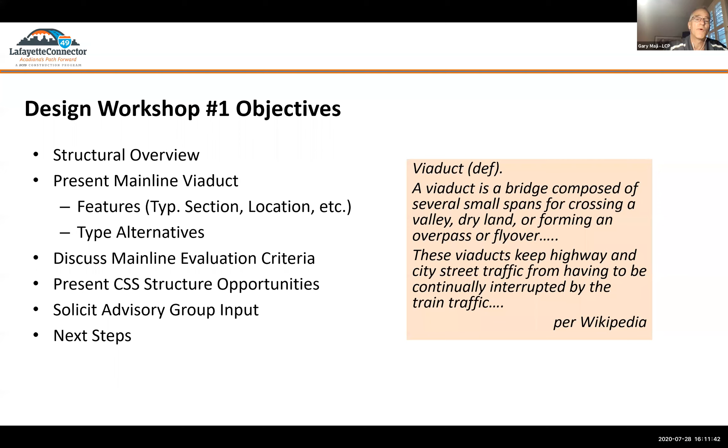So let's get started.

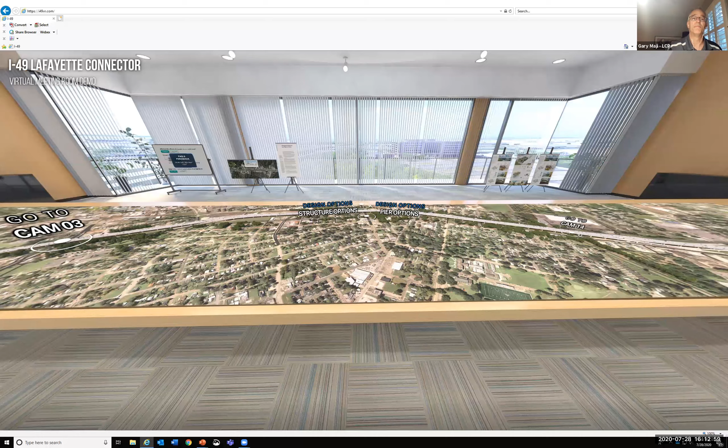So before I get into the slides, I want to get you into what we're calling our virtual room. Bradley's been able to help us put us into a room that shows us exactly what you would be looking at. So as you look from left to right, you can see the south end of the project.

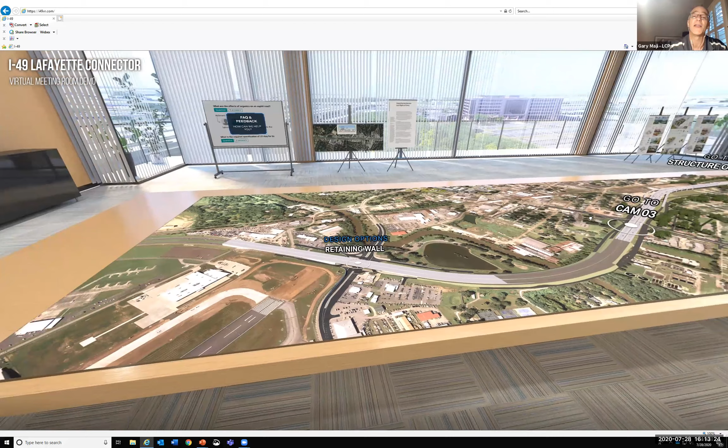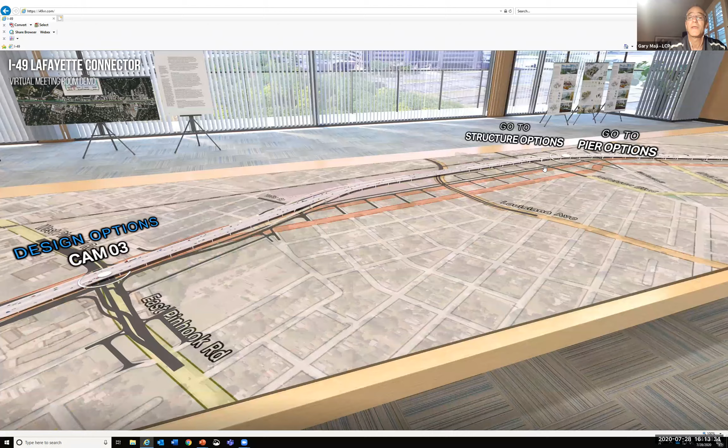And the interchange down there would be University Avenue. As you scroll to the right, you see the beginning of the viaduct from the south end as it goes across and over Pinhook Road and gets into the central region, eventually working its way through the neighborhoods, crossing over Willow Interchange and touching down.

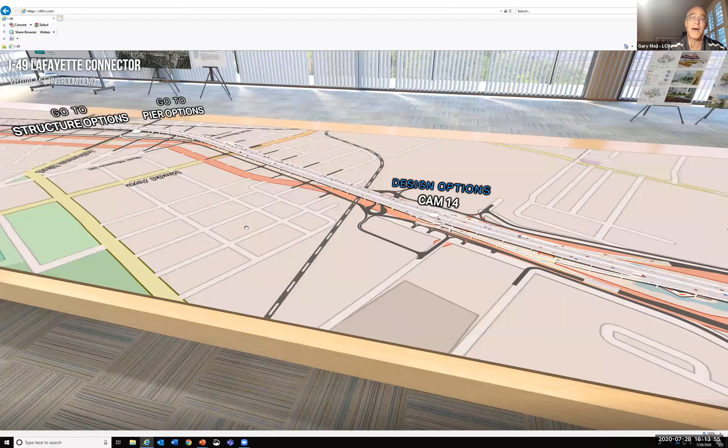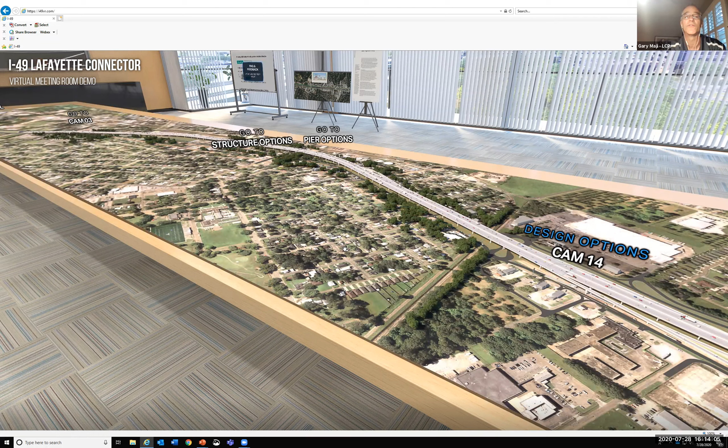We're going to flip back and forth to this a lot, but I just want you to notice it because you'll see the map and the base of the map change from more of a map itself versus an aerial, just to help place you closer to the structure as you think about where this structure is and where the railroad spur is and so forth. And then we'll go along these little areas to provide a little more detail about the viaduct. But the best news is you're going to have access to this after today. Bradley will walk you through how you can, on your own time, scroll through this site and get a little more acquainted with some of the components we talked about.

So let's get back into the evaluation and the structure type. The goal of this project from the mainline viaduct aspect is to provide an economical, safe, and efficient bridge design to serve the project's transportation needs.

We wanted to introduce and identify structure types that reasonably reflect the community and stakeholder input. We want structure types that are technically sound, DOT accepted, as well as cost effective within the overall financial parameters of the project.

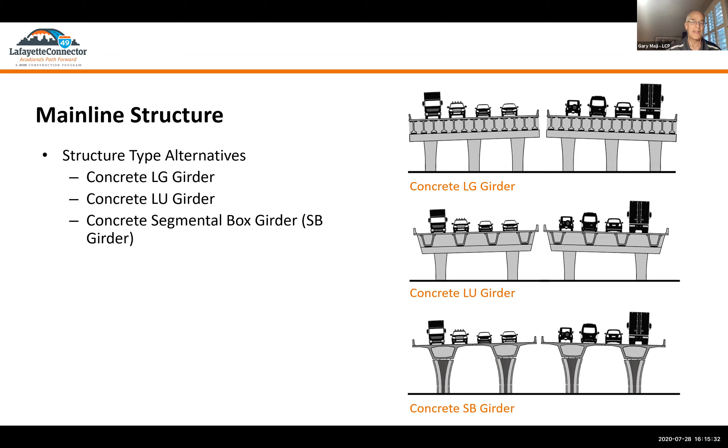That allowed us to identify 3 concrete structure types, which we'll refer to a lot as we go through this presentation: the LG girder, the LU girder, which is the trapezoidal shape in the middle, and at the bottom, which we'll call the SB girder, or the segmental box girder. I'm going to talk a little about each of them, their attributes and what they are.

The LG girder is a girder type you see pretty much throughout the state of Louisiana. It's a very common, very affordable structure type. These girders are precast at a precasting yard and transported to the site, and accommodate bridge spans anywhere from 75 up to 175 feet long. You can see in this depiction 4 lanes each way for this viaduct and the approximate number of girders, which varies depending upon where you are. We can talk about that more as we move into the types.

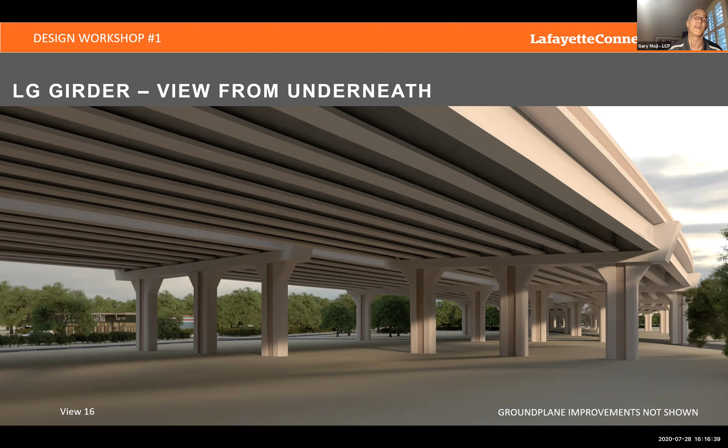So if you want to see what this looks like standing underneath the viaduct, go to the next slide. You can see what that bridge looks like from underneath. Here you're standing seeing this viaduct, and it's 22 feet high. You look underneath, and there you can see the girder lines supported by 3 pier columns for each viaduct, northbound and southbound. If you looked at it from the side, it looks something like this. You're going to see this view as we talk about all 3 structure types. And that's what we mean when we're talking about the LG girders.

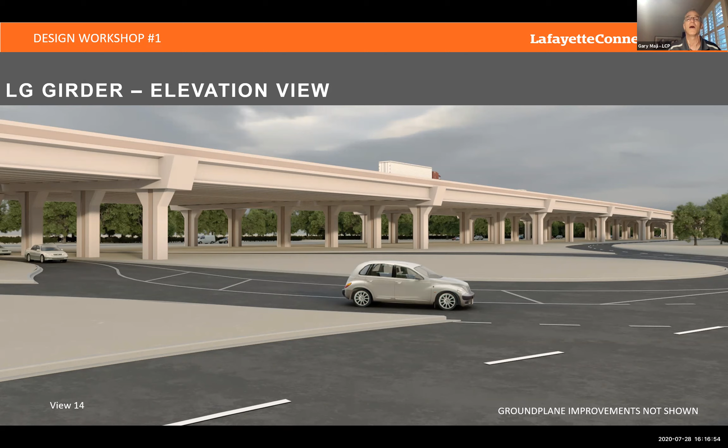Let's move into the LU girders. The LU girders are a newer shape developed by the DOTD, a trapezoidal shape to provide a more aesthetic enhancement, if you will, yet providing the functional needs. These structure types are also precast in a casting yard, and accommodate spans that can go up to 200 to 250 feet in length. But they're also used for shorter spans too, depending upon the needs of that particular project.

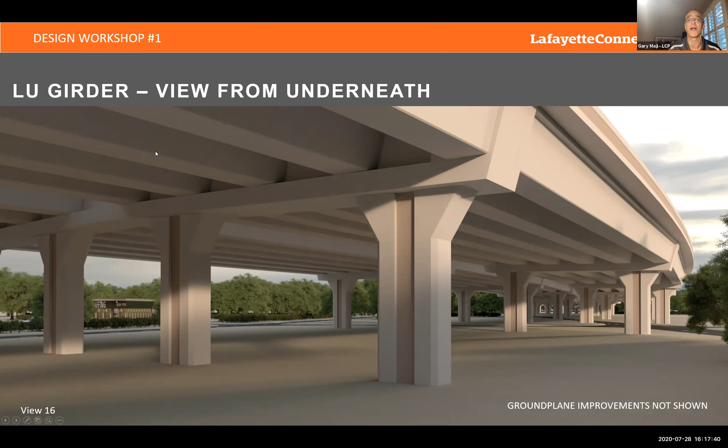So if we look at them from underneath, here you can see the girder lines underneath the structure, supported by 2 columns for each northbound and southbound viaduct. And you see the tapered shape. Then you can see it from the view standing afar, what this structure looks like.

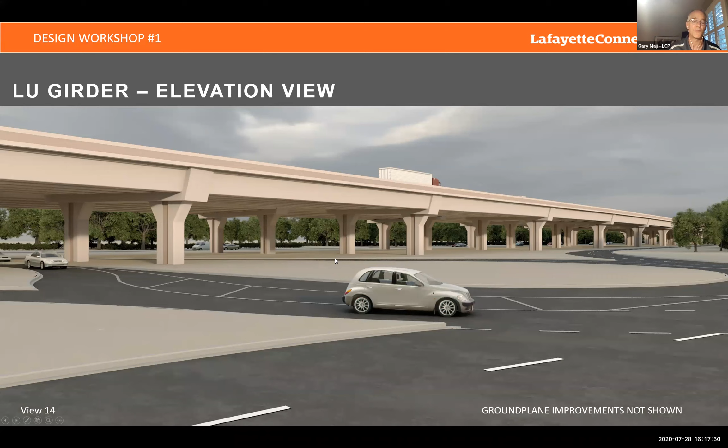And then lastly, we'll talk about the SB girder, the segmental box girder. That's a really simple trapezoidal shape section. This girder can be precast or cast in place at the project site, depending on the needs of the project. But more importantly, it's used primarily to span longer spans, greater than 100 feet and up to 400 to 500 feet. So these structure types are a lot more efficient, and as you'll find out, they're a lot more expensive, but also present a very attractive appearance to the bridge site.

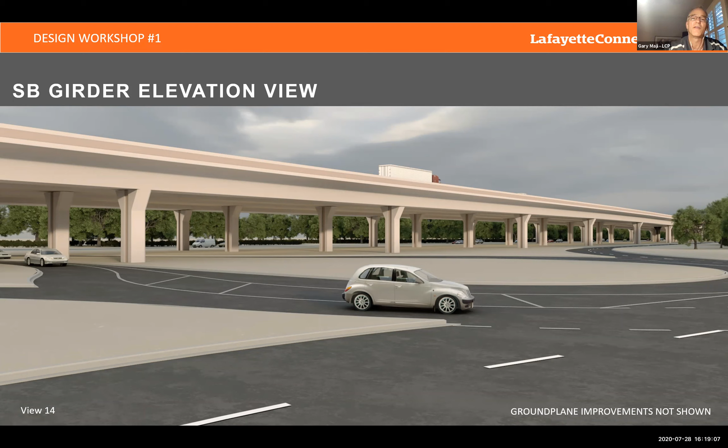So as you look at them from underneath again, you'll see the 2 box girders supported by a single column. This particular structure type does not have the cross beam or pier cap like the previous ones have. I'll point that out as we go back to these slides, but it's basically a single column supporting the girder directly from beneath. From the side you see a very similar view, and from afar there's not much different that the eye can depict, but I just thought I would point that out to you.

So with that being said, that's kind of what the structures look like. Let's see where they are and how they look as if you're standing at the project site.

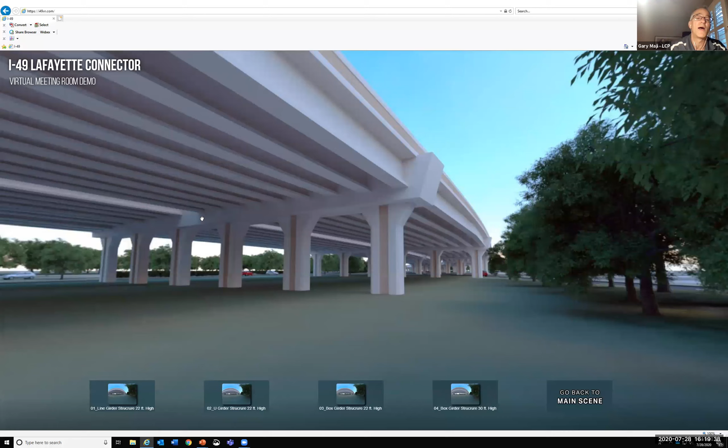So Bradley's going to go to the structure options, and he's going to point us to the design options, which is the hotspot button. Here you can see the line girder structure type supported by a pier cap that is also supported by 3 columns. You can do this afterwards, of course, but you're able to pan through to look underneath the structure, zoom in and out on your mouse wheel if you want to get closer or further away, to help give you a perspective of what this bridge would look like at a 22-foot structure height. So let's go to the next type.

So here we see the LU girder shape. This girder shape only requires up to 4 to 5 girder lines versus the other LG girders, which had more girders. And again, this does have a pier cap, as you can see underneath, supported by 2 columns for each viaduct. So again, we're able to scroll back and forth and see what this looks like as if you're standing underneath the structure.

And then lastly is the segmental box, the SB girder type. Again, you can see the pier caps go away, and you've got 2 lines of girders for each viaduct, supported by single columns. That's what you'll find. So when you come back to this site, I invite you to go through these hotspot areas and look through it, just so you can get comfortable and try to get a feel for what it's like if you were standing underneath the structures.

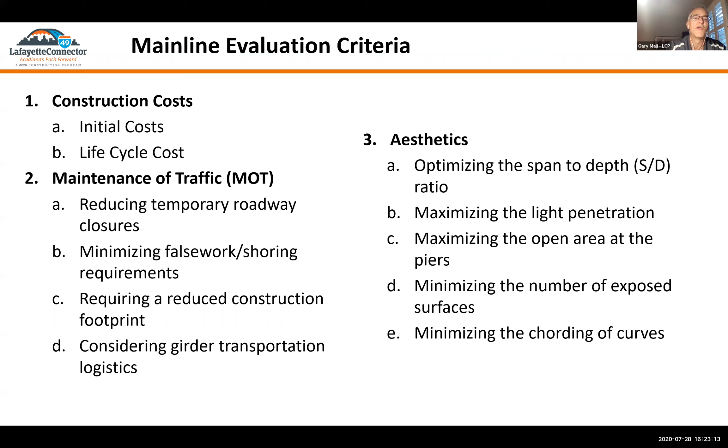So let's get into the weeds and talk about construction costs. The project team has developed what we'll call construction costs, life cycle costs, and a total cost. These costs represent the cost to build the complete viaduct and the viaduct only, assuming a 22-foot minimum vertical clearance in accordance with our ROD requirements, and also the 150-foot span requirement as mentioned in the ROD.

When we talk about construction costs, you can see they vary rather substantially. However, these construction costs are really a function of the quantities and unit costs it takes to build the bridge. But DOTD and the Federal Highway Administration require us to look at the whole design life of the bridge, what we'll call the life cycle cost component. So we take our construction costs and add the life cycle costs to get a total cost.

So what are life cycle costs? Well, life cycle costs are basically preventative maintenance costs—costs associated with maintenance, coating on structures, repairing damaged bridge rails that have been impacted, replacing bridge bearings after their life has expired, or replacing bridge joints that deteriorate over time and have to be replaced. All these costs have to be factored into the life cycle costs in order for us to identify a total cost for the structure.

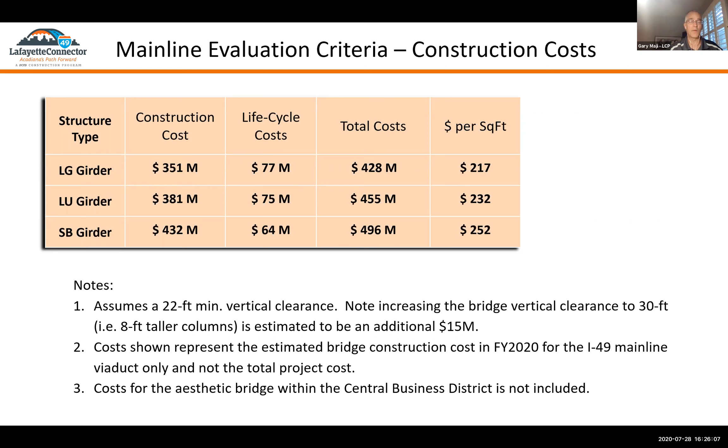We also want to consider the girder logistics—how long and difficult it is to transport these girders to the project site and what impacts it will have on traffic. We're going to talk about each of these individually, as well as each of their attributes. For each of these four criteria, you'll see in the lower left a qualitative score we have assigned to the sub-criteria.

When we think about reducing temporary roadway closures, we think about minimizing impacts associated with erecting the girders—these are temporary closures—as well as impacts during bridge inspections. You see bridge inspections where they've got vehicles on top of the bridge and the snooper truck that reaches over the sides, and that's traffic control and traffic impacts that have to be considered.

So why do these three structure types vary? You can see that with the LG girder type, with spans in excess of 150 feet—similar to the length of the LU girders—you have longer and more construction cranes required to lift these beams. That makes more of a footprint or an impact, requiring more temporary closure.

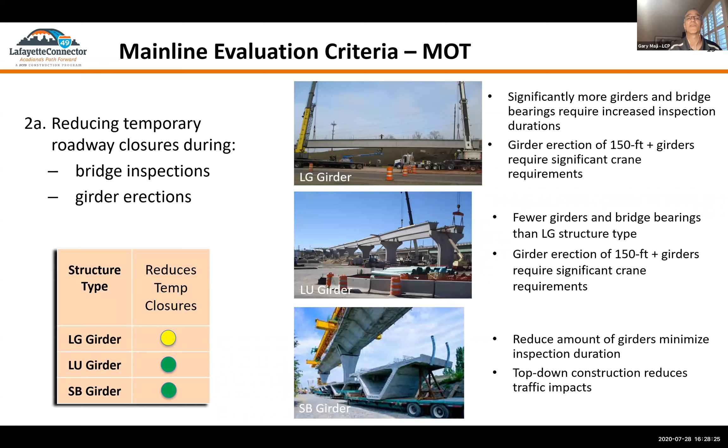Likewise with the LU girders, they have that same length and constraint, but there aren't as many of those as there are LG girders. Conversely, with the SB girders we have a reduced number of girder lengths, and these girders are able to be constructed top down from above. I'll show more pictures to help describe this, but really the reduced amount of girders also minimizes that inspection impact. So let's talk about the second sub-criteria of MOT, and that's minimizing the false work.

And here you can see the LG and the SB girders really got the good grades. Why is that? Well, like most typical construction for bridges, girders are placed from pier to pier, so there's no intermediate shoring to worry about. These girders are basically placed down and you move on. That pier-to-pier construction eliminates those shoring requirements.

These kinds of bridges, as well as the LU girders, are often built with stay-in-place concrete panels. These are basically concrete panels that fit on top of the beams to speed up construction for the bridge deck pour. Conversely, with the LU girders, they do have these falsework requirements, the shoring requirements, and those give a ding to that particular structure type and sub-criteria score.

And then conversely with the SB girders, one is able to basically transport these girders, as you can see in this photo below, really on top of the existing deck and build the subsequent span. That's one way to do it, there's a lot of different ways. These segments will also be constructed from the top down, and I'll show a few photos of that. Lastly, these precast segments for the segmental have the deck section built into the section. So you're able to put these pieces together and then grind the bridge deck with a grinder to smooth out the surface to get the finish and riding surface that you need.

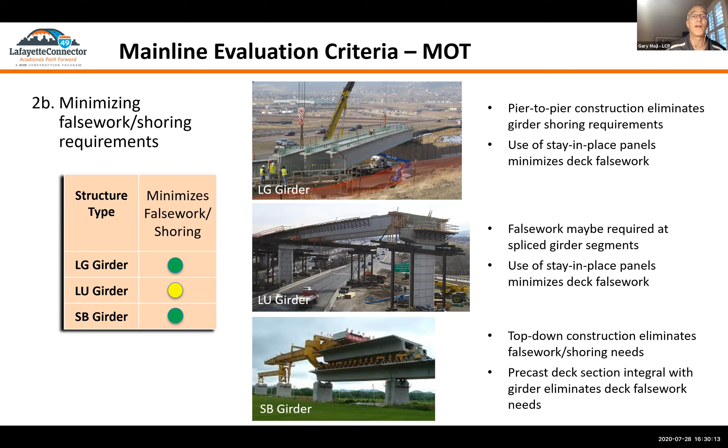So the third criteria for MOT is structures that require reduced construction footprint. The larger girder requirements require heavier cranes, and that's what we'll see when constructing the LU girders and the LG girders. You need two cranes to lift a girder type that's 150 feet long. These girders are basically almost 200,000 pounds each, and the LU girders are even heavier, almost 300,000 pounds each. So it takes a big crane.

And then when you're working with a segmental, here you see these segments brought up from the bottom up through a rigging device. It's a smaller section that weighs under 100,000 pounds, so that's smaller crane requirements, and that's why that gets a better score.

Let's move on to the last criteria, and this is basically the girder logistics - what does it take to bring these girders into the project site. Project sites that are constrained, with a very tight right-of-way or roadways that are difficult to navigate, are going to be more difficult for longer girders like the LU and LG girders to be transported into the site. Here you can see how big these girders can be - the one above shows a girder that's 165 feet long. With the SB girder, we have segments that can be transported on what we'll call a lowboy, a flat semi, a piece at a time, and they're more easily able to navigate into the area. So there's our sub-score for that.

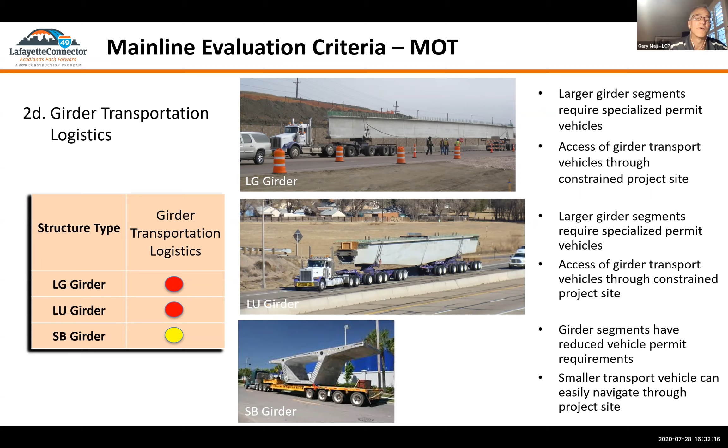So I've got one criteria left for you, and that's going to be aesthetics - the visual quality of the structure. Now I want to preface this by saying that all of these structure types satisfy the ROD requirements with regards to the minimum clearance and span length requirements. So when we put this criteria against the structure types, we're evaluating visual quality. What defines the visual quality? We took a quantitative approach to do that, which is one way to do a comparative analysis.

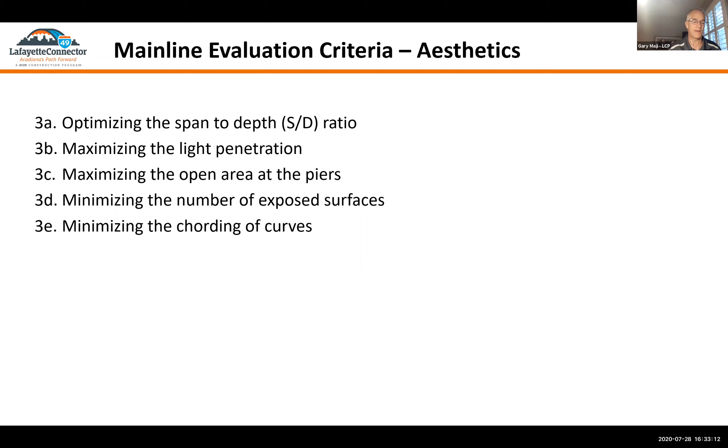So let's talk about the span to depth ratio. Here we defined it, as you may recall in the Bridge 101 meeting, we talked about what the span is and what the depth of the girder is, defined from the bottom of the girder to the bottom of the bridge rail - that's basically the structure depth for the girder. And that span to depth ratio, as you can see here, all falls within around 20, which is basically optimum with regards to concrete girder bridges.

Span to depth ratios that are higher result in thinner structure types with longer spans. And so they may not look as good, they may not perform as well. That's why when we set these structure depths and span requirements, we want to hit that optimum to provide a cost-effective structure type that is going to really be a project winner for the structure.

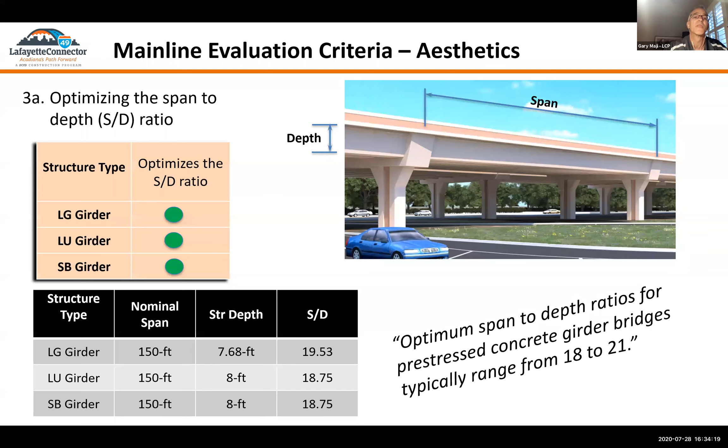So when we talk about openness, let's go to the next criteria: maximizing the opening area underneath the bridge. Structure types that have more columns are going to have more obstructions, and it's going to be harder to see through them if you're standing underneath.

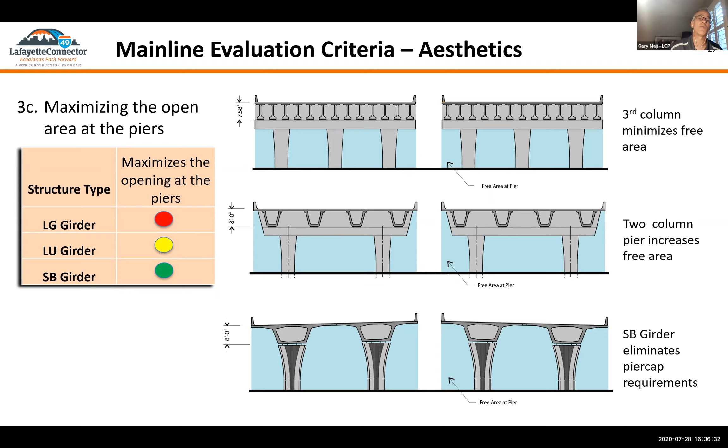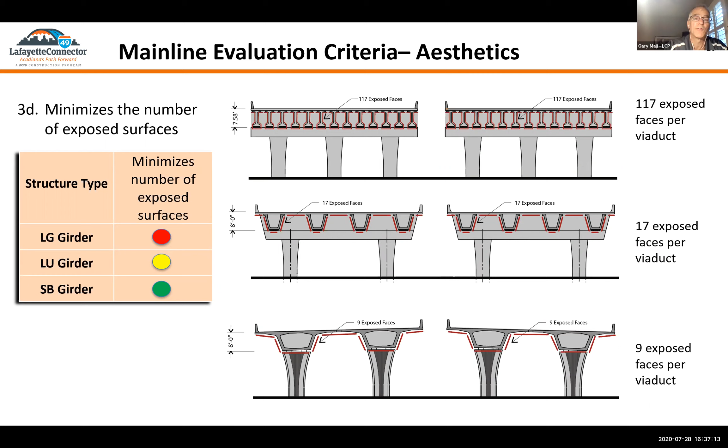And then lastly, we're going to talk a little bit about bridges along curves. You know, driving through New Orleans or Baton Rouge, you see these curved bridge ramps, and these curved ramps are supported by straight girders. That happens all the time, so that's not a surprise.

Now the good news is for the main line, our curves are not extreme - they're not anything that would prohibit the use of straight girders. So we're able to use all of these structure types, even though we have curved alignments. And that's as it goes for the main line section only, and not the ramps.

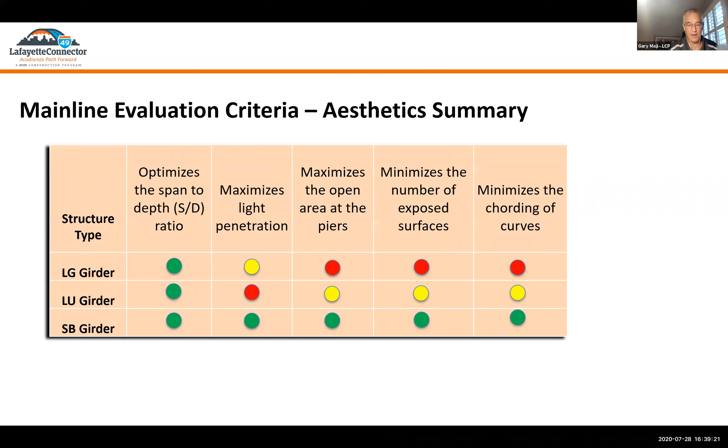So our team took those sub-criteria and developed this qualitative score, used to evaluate what we thought were very feasible structure types. And quite frankly, they're all feasible structure types.

And with that, I'm going to stop and open it up to some questions if there are any. There are. We'll go from there. I know that was a lot of information.

Samuel Oliver wants to know, is 22 feet height a variable in this project? The 22 foot height is a minimum from the standpoint of the ROD requirements. We talked about this in an introductory meeting, where in order to satisfy the ROD requirements, we had to provide structures with a minimum structure height of 22 feet and spans of 150 feet. Now that doesn't say they can't be taller. Bradley's going to answer that maybe a little better in the next few slides.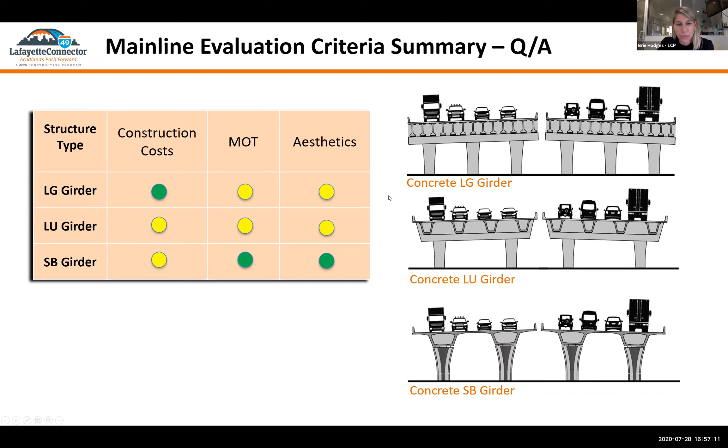The next section we're going to talk about is the CSS structures considerations, or what are the aesthetic opportunities that present themselves within the context of these basic structural forms we've been talking about. We want to talk about a variety of different things with you today.

The abutment is the portion that allows the bridge to meet the ground or intersect with the terrain. We've also got piers and columns, the bridge railing, also known as the parapet rail, girders, which is the main superstructure element that spans horizontally, and approach walls in the form of vertical abutment walls and retaining walls. I'll take you through some of those different elements, starting with the piers.

Let me preface all of this by saying that this really is the starting point. We have some basic fundamental forms that have to be placed on the landscape in order to support this structure. So we want to make sure we're seizing all the opportunities we can to massage the shapes of those things in clean and efficient ways, so that we're realizing the greatest aesthetic return on the investment of having to build those things.

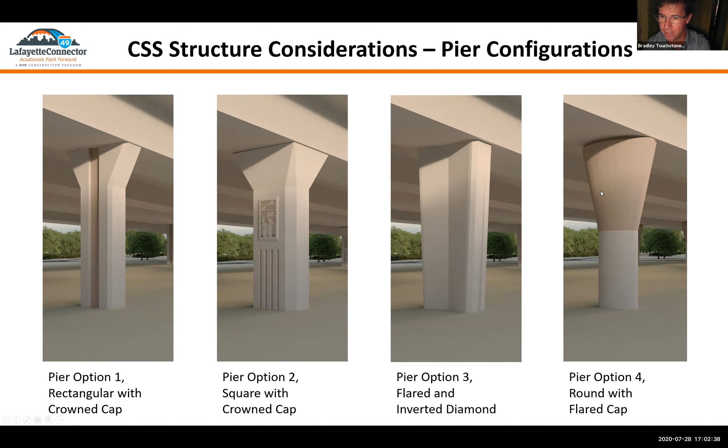Do we want something that can be much more stylistic, that might include something like Art Deco treatments? Do we want something that's super modern? Or do we want something that's just as soft and gentle as it can possibly be?

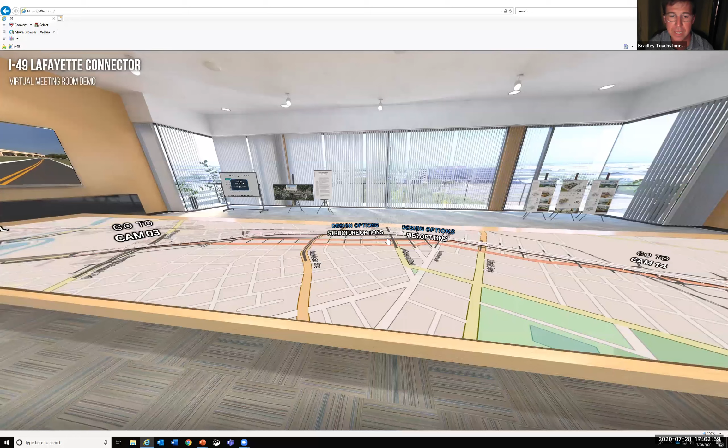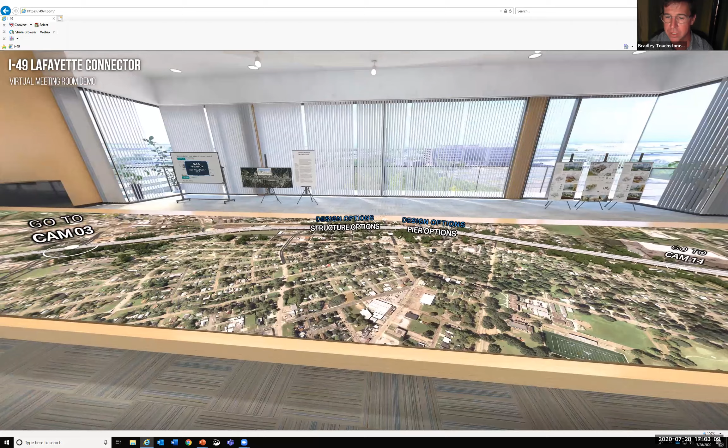We've got the virtual room, and I want to give you a few more details. We've created this virtual meeting room for this project and put our project on the table with a couple of different hotspots. You'll get a link to this virtual meeting in addition to the presentation material we've given you, and we invite you to go visit, click on the links, explore around. You can actually scroll in and out to zoom in.

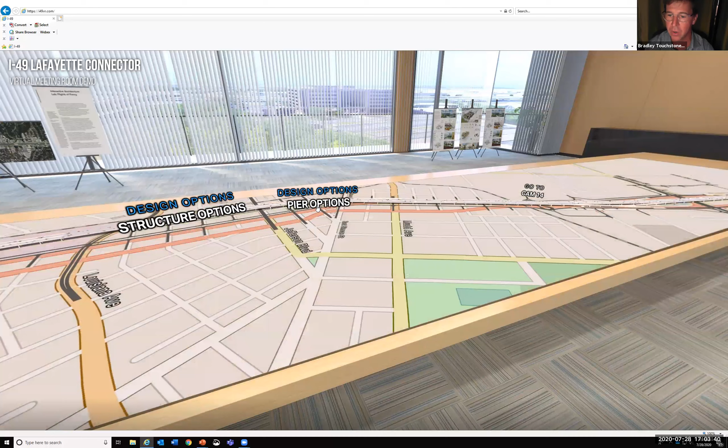We're going to continue to update this so that as we begin to explore some of the different signature bridge options, for example, we'll have those included in this virtual meeting room. Eventually there will also be displays you can click on with hyperlinks that bring up more detailed information. So this really is going to become our virtual design war room, that you can visit and begin to understand not only the different elements, but how they're working in conjunction with one another.

So if we look at these different pier options, for example, here we can see a whole host of different options, starting with... let me go back to the beginning here. Starting with, you can see in the upper left-hand corner, the LG girders with the different pier options.

And the LG girders illustrated are a 3-column bent, is what we call it. So each pier cap is supported by 3 columns.

And here we have pier option 1. Just a second. Pier option 2, illustrated again with the LG girders, and this is that more fluted rectangular form for piers with, in this case, the medallions. Those medallions might be only in particular locations along the length of the bridge, so maybe only at significant crossings of roadways or in park settings or some other key elements along the length of the viaduct. That more contemporary triangular form, and then the circular or rounded form.

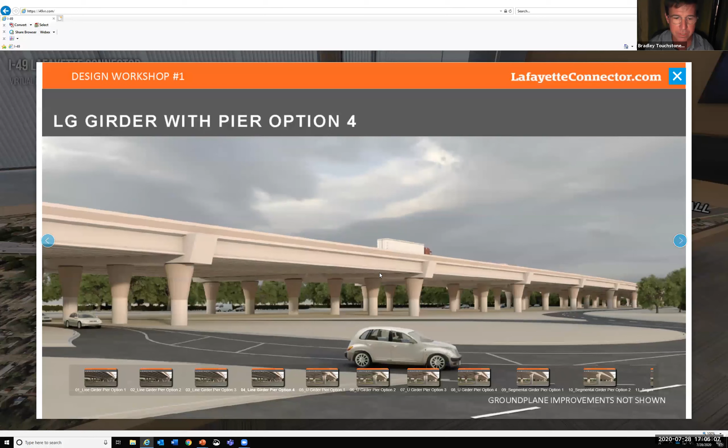And I think these kinds of views are important. I'm going to show you another view as well from underneath, but it gives you a sense of the number of columns, the height of the structure we're talking about, the level of transparency through the structure. And then if we look at this with the LU girders, you can see now we've dropped off to 2 columns, and we've got the 4 LU girder lines for each structure, and we've got the different pier options, again, illustrated with this superstructure.

And then finally, that same thing with the segmental. Now we've dropped the transverse beam that connects the columns, so now the columns go up and meet directly at the underside of the segmental box.

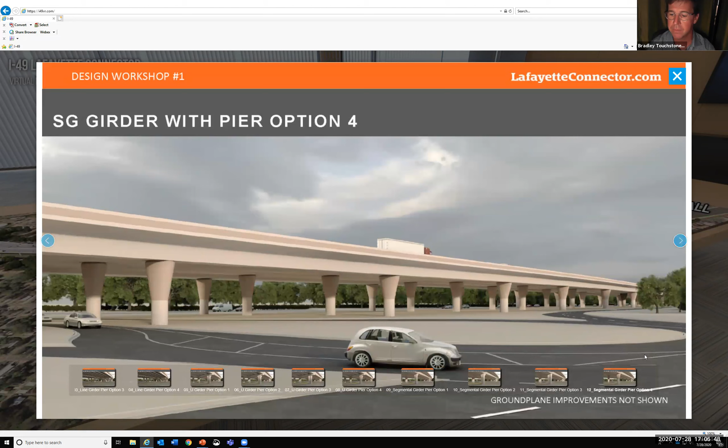And then I'll take you to, if we go over here to, this is location 16, and you can click on the pier options, and here you'll actually see all of those different options illustrated where you're standing underneath the bridge. So now you can really get a much more up close and personal understanding of, okay, what are these forms? What kinds of spaces are being created? And what does the combination of both column and beam and superstructure look like?

And we're going to also provide you with a feedback form at the end of the meeting, a link to a feedback form. And what we're really looking for, again, is your thoughts and ideas about appropriateness and what might make the most sense for this community. So how can we begin to stylize all of these things so that we're really creating a meaningful fit with the different elements within the community?

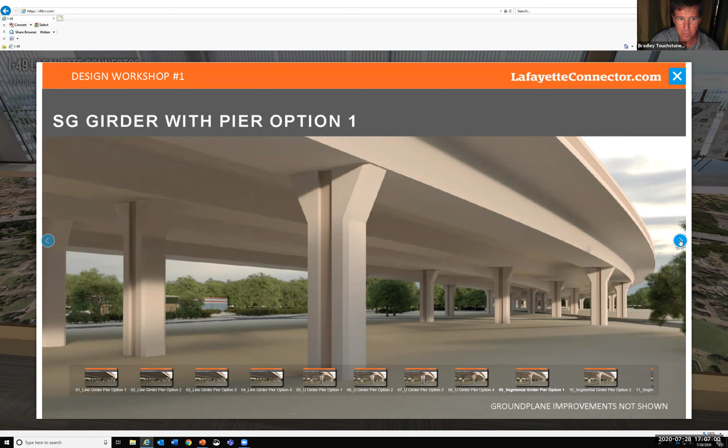And I'd also like to say that the decisions made about the signature bridge will also help influence everything we're doing with regard to pier shapes and abutment walls. So as that signature bridge element becomes more in focus, I really think it's going to help serve as a major guidepost for the forms and treatments of a lot of these other elements.

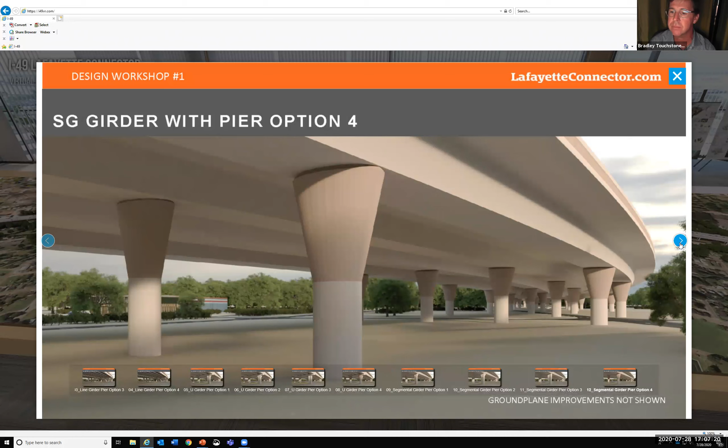So again, just a quick recap of these different pier options. I'm going to pause right there because I know this is a lot to take in, and I'd like to answer any questions anyone may have about this process and how much flexibility we have, or any initial reactions or feedback you'd like to give us.

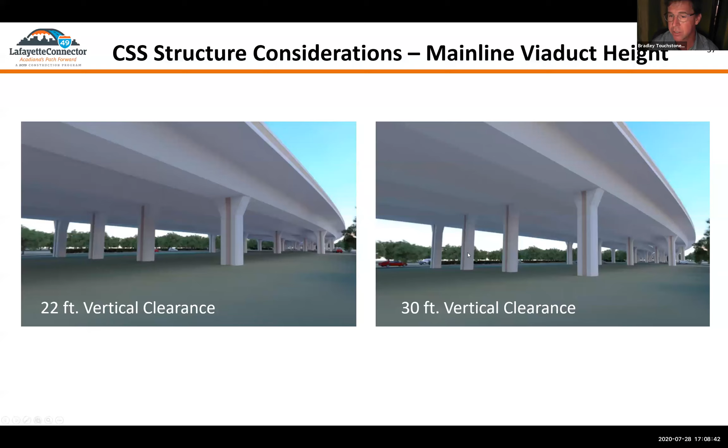Another really important element that's been raised is this notion of vertical clearance. The current design accommodates a beyond-standard 22-foot vertical clearance, but there's been a request to explore the visual impacts of going even higher. So what does this thing look like? What are the effects if we look at a 30-foot vertical clearance?

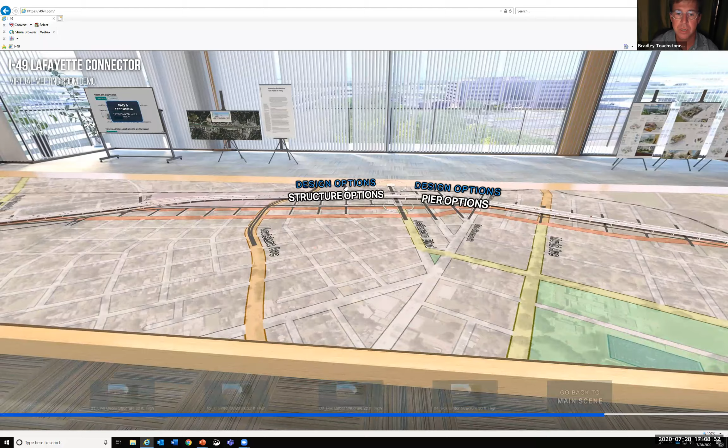So if we go to our structure options, where we had our different VR files, you can click on these and it's just like one of the virtual home tours during the COVID exercise, where you can click on this and scroll around to see all of the different vantage points available within the 360-degree view. This is the 22-foot vertical clearance, illustrated here with the segmental box superstructure, and we can compare that with what happens if it's raised to a 30-foot vertical clearance.

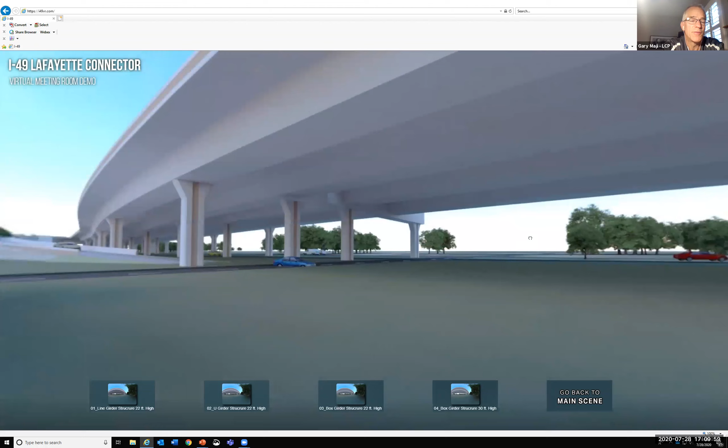So nothing else has changed. Superstructure is the same, span lengths are the same, column locations are the same. The only thing we've done is raise the structure from 22 feet to 30 feet, to give you a sense of what that does underneath the bridge. Brad, why don't you spin around to the left and do the same 22 to 30 foot comparison, so you can see that difference from a different perspective.

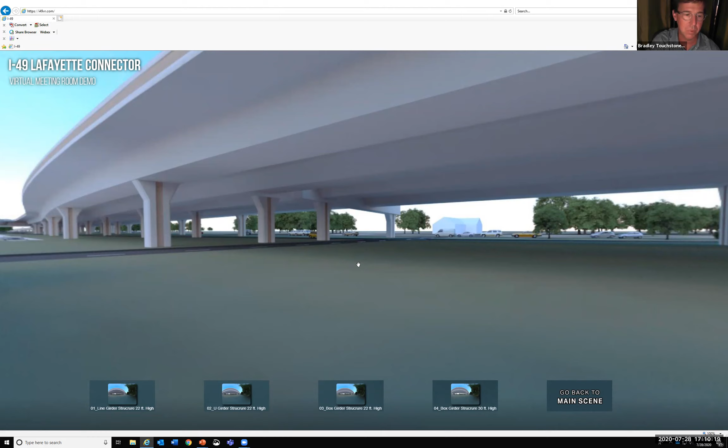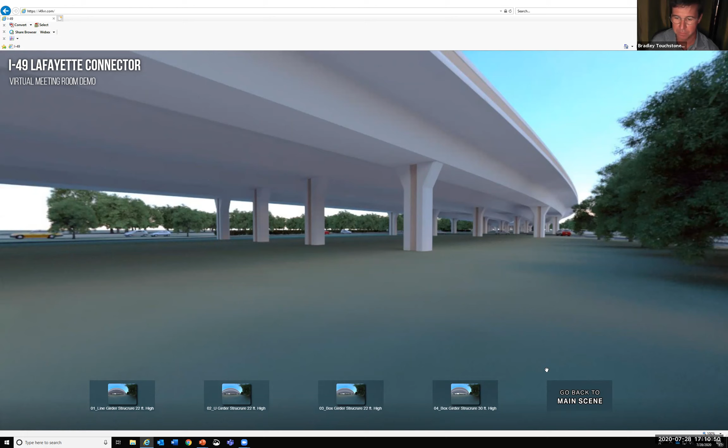This is a study model, and I'll say we've eliminated everything on the ground plane for right now—we're not even showing grass or dirt or anything else. All of that will be developed programmatically as the project continues, with landscape and hardscape elements introduced in future workshops. That has a big influence too—it's not just a raw superstructure standing on a blank canvas. A lot of how this thing stitches itself into the urban fabric will be defined by what we do with landscape, hardscape, and other elements. Lighting certainly has a big impact on that as well.

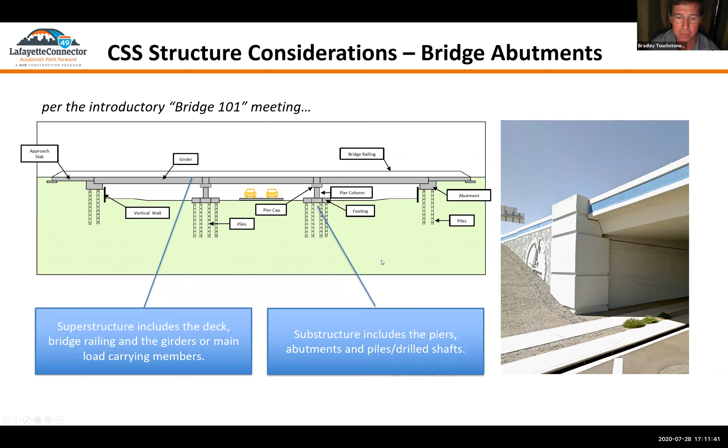If we move down to where the bridge touches down past the Willow interchange—and if you visit the site, you can click on design options—that's going to show you a whole lot of different kinds of forms that can be applied to these abutment walls. This is important not as an individual element, but as part of this greater composition.

So if we're wanting to do something thematically that has to do with nature, maybe we want to look at a natural texture or some sort of stone texture on the face of those walls. Similarly, if a very modern, contemporary statement is important, there are bold geometric patterns we can introduce that use not so much color, but shade and shadow to define the planes of the abutment walls and retaining walls.

There's also an opportunity to create imagery. With formliners and all the formliner technology that exists today, there's a tremendous amount we can do to introduce imagery into the patterns of these walls. That imagery can also become part of one of those art-in-public-places initiatives, where we can create placeholders and engage the local art community, or the local community in general, to help define what's appropriate for that imagery.

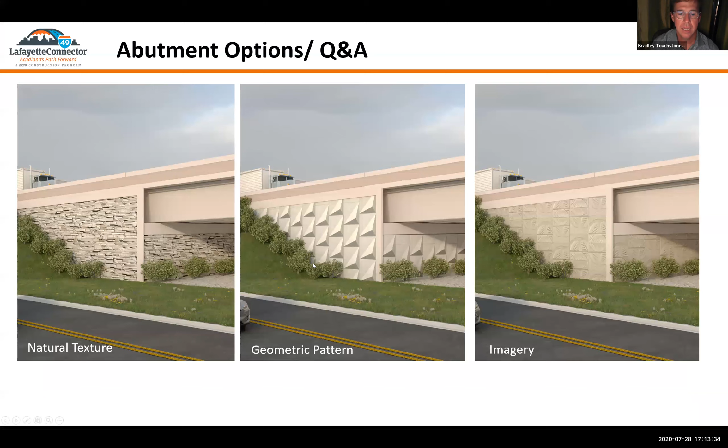So these are the three things I just showed you. Similarly to that are the railings. Again, a minor detail you can see here on segment K - we actually took the recess and created this little recess on the back of that concrete parapet wall or bridge rail. That little bit of recess and change in color creates this very nice, subtle pinstripe, if you will, that really begins to highlight the form of the structure as this long, uninterrupted ribbon.

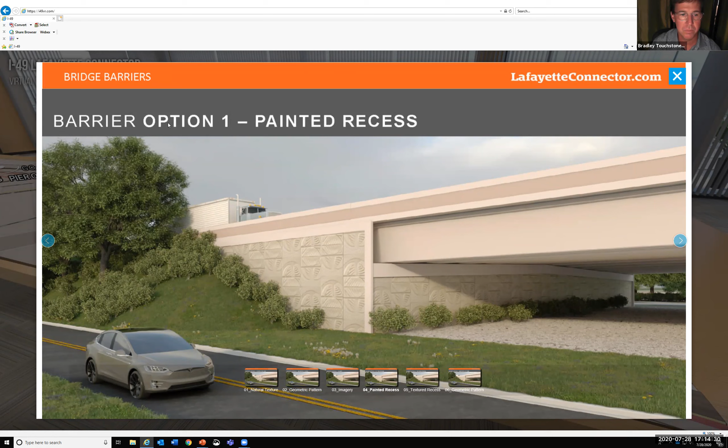So again, at that same abutment wall location on the virtual meeting room, we've introduced a variety of different barrier options. Similar to segment K, we've got the painted recess. We've also looked at different ways to texture the backs of the railings, so we're not relying on color, but on shade and shadow to create this textured form. Or we can use a very strong geometric pattern - the one I showed you previously for the abutment wall was very contemporary. We can also use those same geometric forms to evoke something like the Art Deco style, and really begin to allow the little details to reinforce the bigger, broader stroke moves of the overall project.

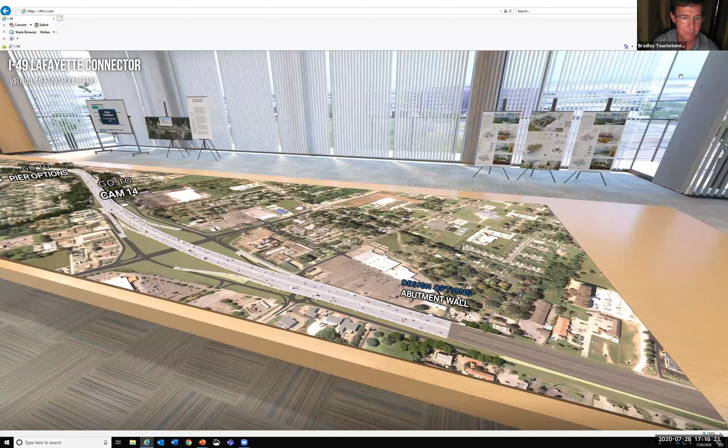Bradley, we're losing you. Oh, can you still hear me? Okay, it's better now. You're in and out - let's take a break and answer a few questions, Bree. You guys are an easy crowd today.

I do think it's very important, and we'll talk about it again in a minute, that we are going to be heavily relying on your thoughts and your input. Please take time to review this information before we reconvene on Thursday. Talk to your constituent groups, share with them all of these different ideas, and let's brainstorm some opportunities, because this really is a huge opportunity we've been given to make sure we allow this project to begin to stitch itself into the fabric of the local community.

And similarly, the retaining walls are going to be very important. This is actually the Palmetto interchange down in Miami, Florida. You can see here this kind of imagery where they took the MSE wall panels and used a form liner to create this abstract palmetto pattern that runs its way throughout the project.

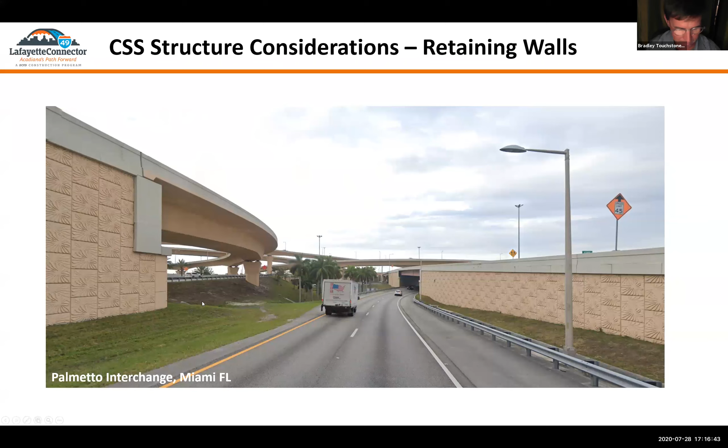So Bradley, there was a question asked: do some of those patterns and forms perform better than others over the duration? The more complicated the form, is it less likely to be durable, or do you have any insight on that?

Really the biggest thing is the tighter split-face type forms retain dirt more, so you need to be aware of that. The bigger, bolder shapes don't collect dust as much. I think you really need to think about these bridges, since they're designed to last for many, many decades - everything we do needs to consider not only what it's going to look like on opening day, but what it's going to look like 50 years from now. If it has a tendency to retain dirt, you can actually use that to create visual richness. So I don't know that from a durability perspective there's really much difference - they're all meeting the same durability requirements, but they will certainly age differently. Similarly, I think relying on shade and shadow more than painted finishes leads to a much more visually durable product, because paint will fade over time. It does require maintenance, but if the basic texture and form of the thing can create the aesthetic you're trying to achieve, that's something that's never going to go away.

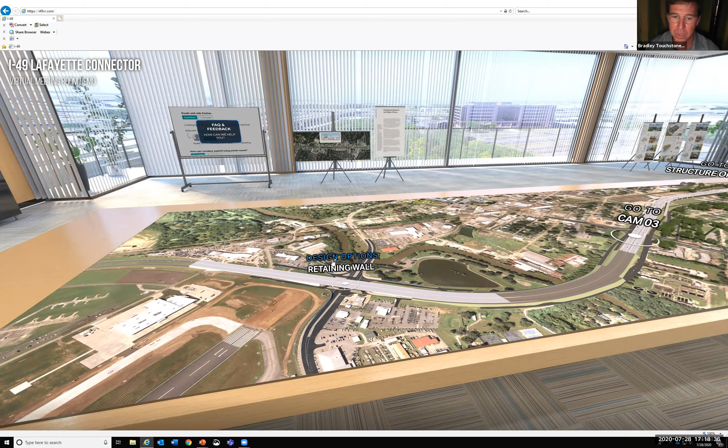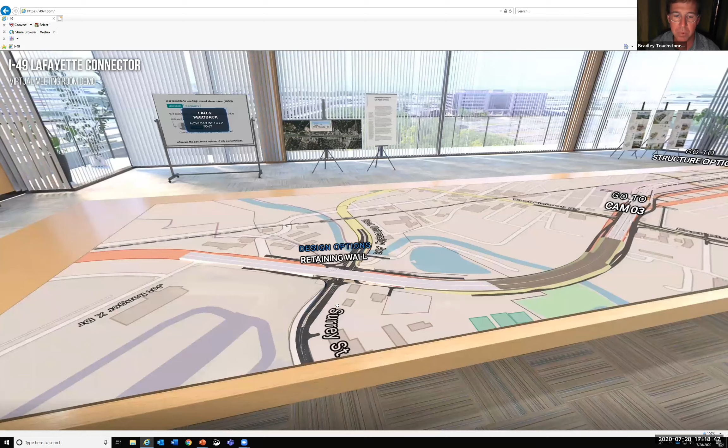As we're thinking about all of these different options and putting together the final recommendation, let's make sure we keep our eye on the prize with regard to durability. I did want to point out, too, this is that University and Surrey interchange.

You can see its location is very close to the end of the runway, so we're not able to raise up the roadway a great deal. Instead, we've got to recess University and Surrey as it goes underneath it, and the result of that is going to be a large number of retaining walls.

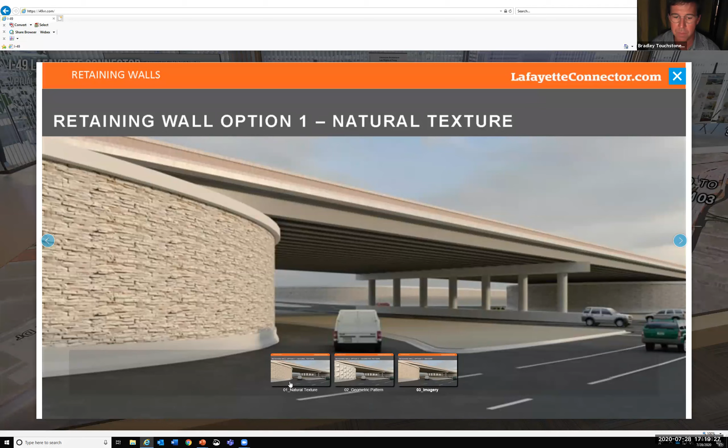Certainly the way those get integrated from a landscape perspective is going to be hugely important and offers a tremendous opportunity. But we also want to think about what kinds of treatments we want for those walls, whether it's a natural finish or a much more bold kind of geometric form.

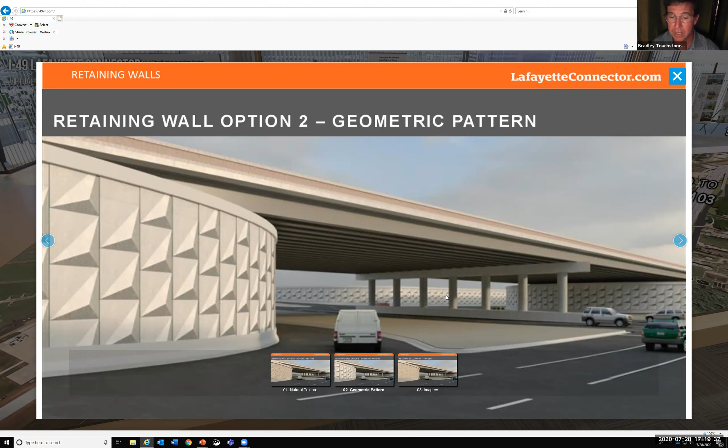In this particular area, there's tremendous opportunity to think about art in public places type initiatives, where you can really use the canvas of these walls to create something that's fairly significant within the community.

So that's the end of this part of the presentation, but really the beginning of the process. We're talking about the basic forms, but we have an awful lot of other details that we're going to continue to layer on top of that over the course of these next workshops.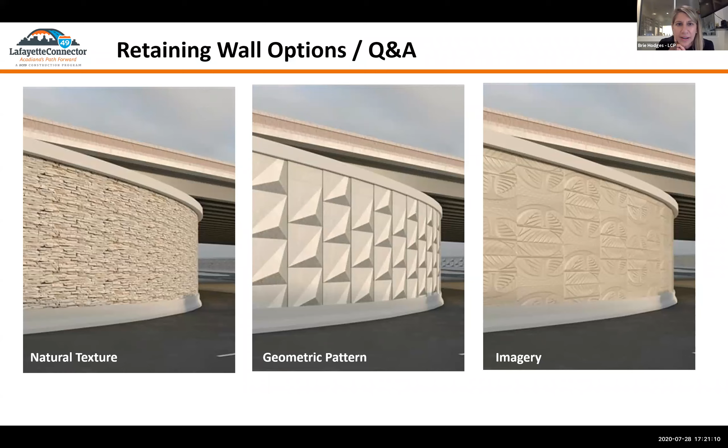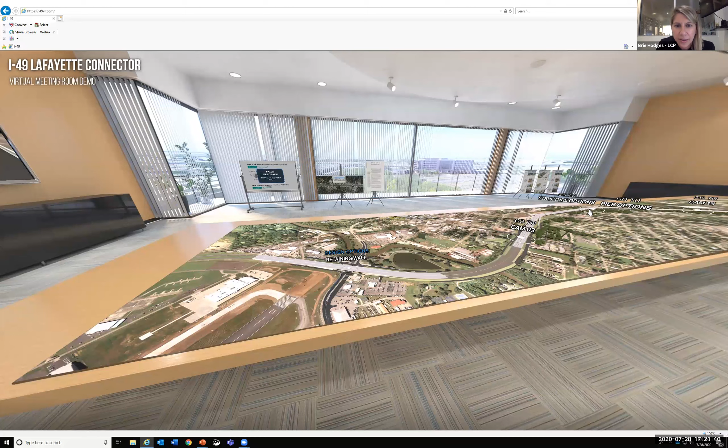Okay, and I believe Charles, you might be unmuted now. You had a couple of questions, and I think that last one was answering your question, so I hope it did. I've lost some of the chats, but it looks like there's one from Sam: are these meetings the only opportunity for public input from the impacted neighborhood on the design element? And if so, how can we support getting their voices heard in this process?

That'd be a good question for Steve Wallace. This is the beginning, right? There's a lot of opportunities.

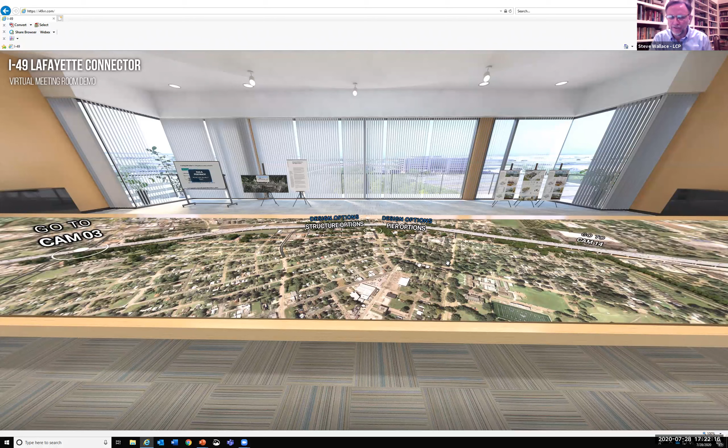Just so you know, the LCAG input is one of many aspects of input that we'll be getting. We will be holding meetings directly with the neighborhoods that are right adjacent to the corridor itself — Tina, your group, and others right adjacent to that — so we want to get direct input from them. That's part of one of your questions too, getting input from them on what they think about those structures. We realize the LCAG has some important input, but there are other groups we want to hear from, including the residents right next to it.

Historic groups, Freetown-Port Rico, and others we'll be hearing from as well, and other groups up and down the corridor, whether it be Willow or more the core area. We'll also have public meetings open to everyone and anyone to come and see similar things and be able to give us input.

What we are kind of counting on you guys to do is help represent a constituent group. You heard Gary mention that a while ago, and Bradley as well. We would like for you to help us gather input from folks in the group that you represent. It's not the only avenue they have to give input, but you helping us gather that from them is certainly a good thing to do as well. So does that help answer the question?

Yes, and this is Sam Oliver. I'm really just echoing Tina's question. I would really rather she be unmuted. Okay, gotcha. Hey, Tina, how are you?

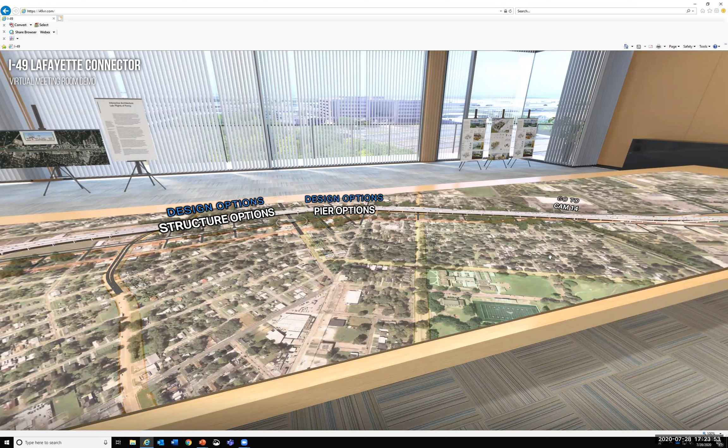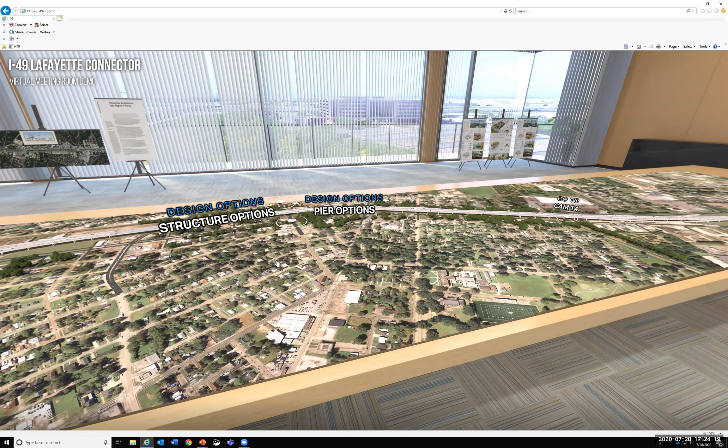I'm unmuted, thanks Sam. I said this when we started the I-49 Connector project many moons ago, that I felt we were lacking in resident participation when there were voices that wanted to be at the table. I understand our role on this committee is to take it back to constituents to get more feedback. But it would help for the larger committee to not only hear those smaller discussions but be part of them, to hear from the horse's mouth what they think of this connector, to help guide our decisions. It seems like you're asking for feedback based on our understanding of what you're presenting, but then we have to go back to our constituents and present it in a way that makes sense to us and them.

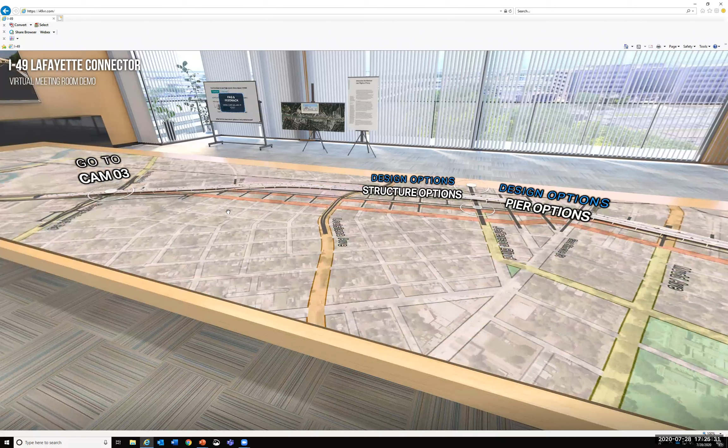I think it would be helpful, similar to what we did with the 49 Connector, where we allowed the public to view these things even if they don't comment, so they can see while you're explaining it to us. Because no one on this call except the engineers knows what y'all are talking about with this design. It would help if we allow the community to hear this discussion in detail, to help with further discussion and get the feedback you guys really need, so when we talk to McComb-Veazey, Freetown, and the Sterling Groves of the world, we're getting meaningful feedback and not spinning our wheels, and can actually move this project forward.

And then also, while I have y'all too, the Beaver Park comment — just a quick answer, doesn't have to go into a lot of detail.

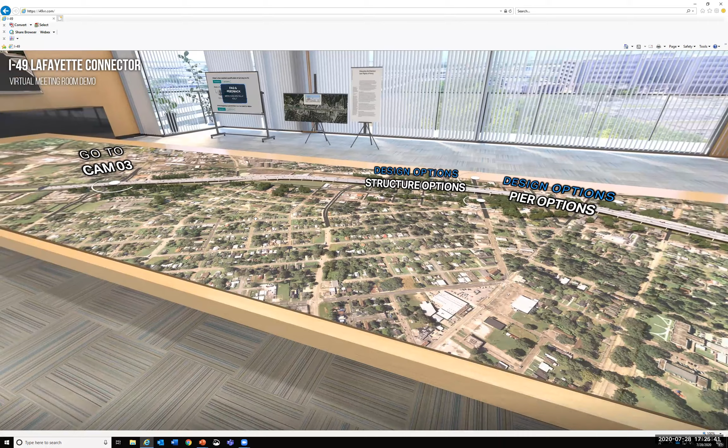The short answer, Tina, to your question is with your neighborhood, we will be coming to you guys and showing you similar things and getting direct input from you. They can give you input that you can give back to the group, or they can do as others are doing today and listen in on the conversation. As Bradley said, a lot of this will be on the website that they'll be able to access also. So it's not like your neighborhood is only going to hear from you or through you — the intent is to allow them several different options to get input to us, and the LCAG input is one of many we will be getting.

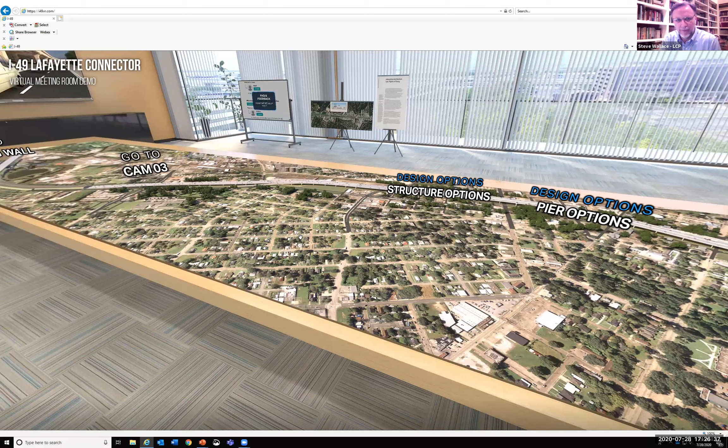We're trying to accommodate that in a reasonable and feasible way, because there are a lot of folks that need to be represented on the LCAG. So in order to help facilitate input, that's the reason we have a lot of different layers of how we're going to be reaching out. I don't know if that helps or not.

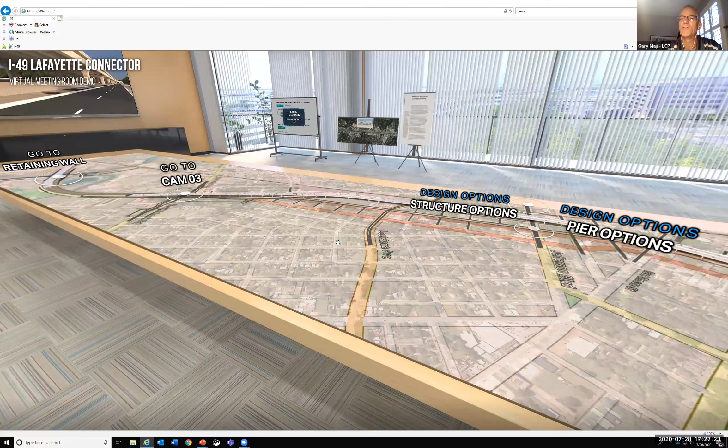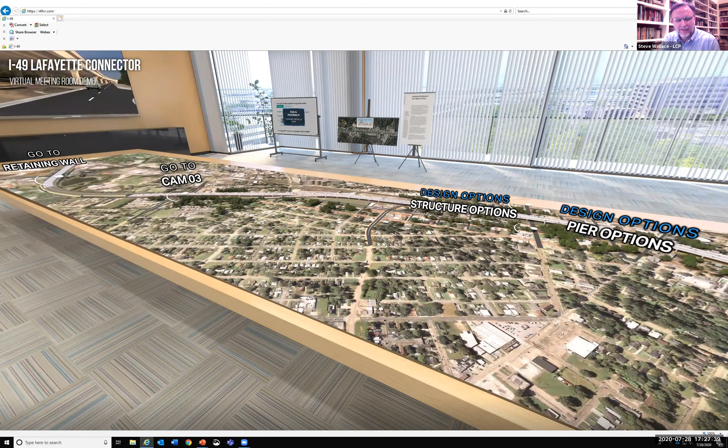The other question she had was what happens to access at Beaver Park with the additional retaining walls. We haven't explored that part yet, I think that's going to be a future discussion. The short answer is you'll still be able to get to and from Beaver Park — it's not going to cut off access in any way. In fact, access should be enhanced. You'll be able to get to and from the park going in all directions, and we'll be accommodating bike and pedestrian traffic in that area as well, so the walls won't inhibit that, if that was the concern.

Okay. Let's see. One second. Let's see.

Question from Charles: Don't NEPA and CSS require community input early and often? Why not broaden input at this stage? While we can represent our various groups, it is the project sponsor's responsibility to ensure full community participation. I think, Steve, you answered that just a minute ago, but if you want to add anything.

Charles goes on to talk specifically about the Black community, et cetera. That's the reason why we wanted a multi-tier approach to getting input. The LCAG is a representative group, so we'll get input from you and through you from your constituents, but also from community neighborhoods, specifically around the Willow Grove area. There are a lot of features there we want input on.

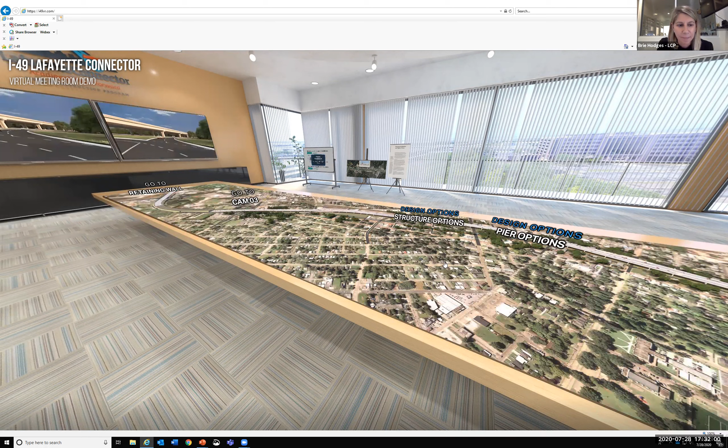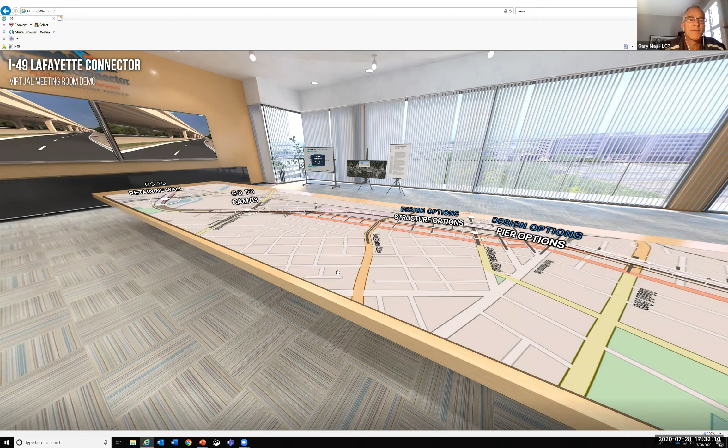Gary? Sure, Bradley, why don't we go back to the slide prior to closing for the next steps. As Bradley mentioned, we're hoping to get input as much as possible all the time, that's what we're all about. There's a lot of information here, as Bradley mentioned. This information will be available, the PowerPoint will be available, and you can literally scroll through the website as if you were standing there, being part of that process.

But the next thing Bradley wants to share is really how you can help provide that feedback. What happens between now and Thursday? Bradley has a feedback form we're going to send out, in addition to this information, just to get you thinking about these particular context-sensitive elements and anything else you want to share. Then we'll bring all that information to a meeting on Thursday at the same time, go into breakout rooms, talk in smaller groups, get that input across the different breakout groups, and bring it back into a summation meeting at the conclusion of Thursday's meeting.

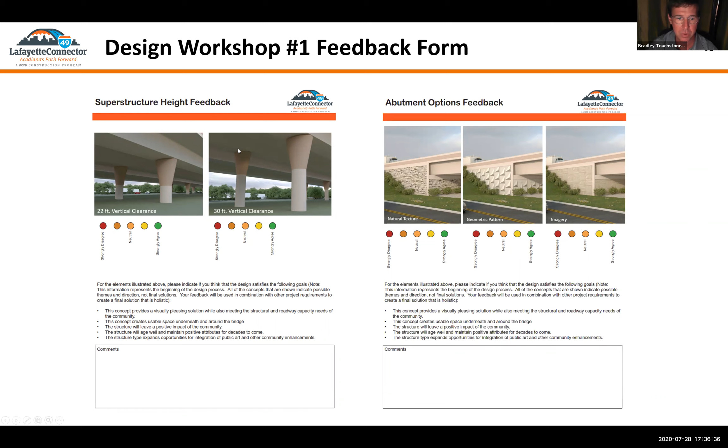This really is just the beginning of this conversation. The more we can talk about it and share ideas, the richer this thing is going to become, and the better suited it will be for the community. Thursday is the beginning of that process with breakout sessions—small groups where we'll have the opportunity to talk in detail about your thoughts and ideas, as well as those from constituents you've hopefully talked to or met with over the next few days.

Hey, we ended early. Just some information for you guys about what's coming.